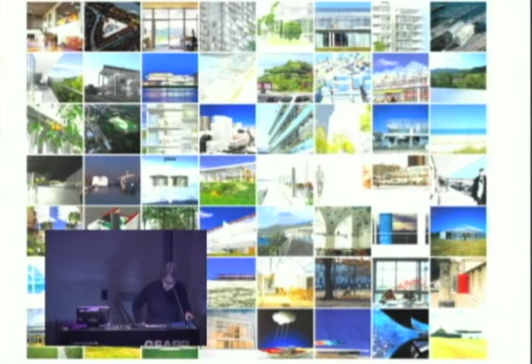I will talk tonight about the question of how to reinvent from the existing and present some projects which specially deal with the existing. However, these projects are part of all our projects.

You mentioned that we have done many projects, but not so many in 25 years. And the projects I will present tonight cannot be dissociated from all this cloud of projects because they form a continuous process of accumulation, addition, and reinterpretation. All these projects talk first about inhabiting, use, freedom, the value of the places, how you move in and transform them with attention and delicacy.

The concept of inhabiting is a major concept for architecture, as for some projects, founding projects like this one: the first house we did in Bordeaux, social housing that we did 20 years later, a house in the trees on the seaside, the Palais de Tokyo in Paris, or the School of Architecture in Nantes. The concept of inhabiting in all these projects is a major concept for us in architecture.

Inhabiting is about the pleasure, generosity, and freedom of occupying a space. It challenges us to think about the possibilities of the space around us and ahead. And architecture is about building multitudes of situations of usage, connected, intersected, and mobile.

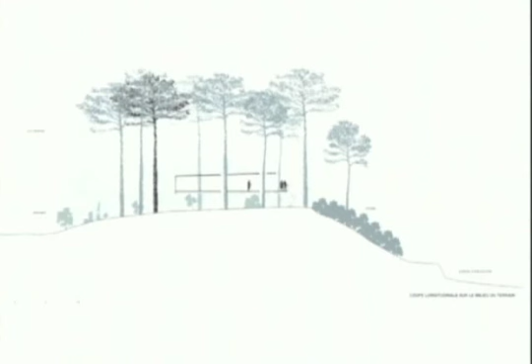The first one was to say, we will not cut any tree. We will keep all the 45 trees here, and we will raise the house 4 meters above the ground to protect the shape of the ground, to not damage this very fragile sand hill, and also to take advantage of the best view by staying 4 meters above. Then it was how to make the project so that it remains as light as these two initial ideas. So the house is a very simple house. It's a rectangle. There's not a scenography of the trees. They are just staying where they are, and we just took care that the construction doesn't touch the trees and takes enough distance to accept the movement of the trees in a strong wind.

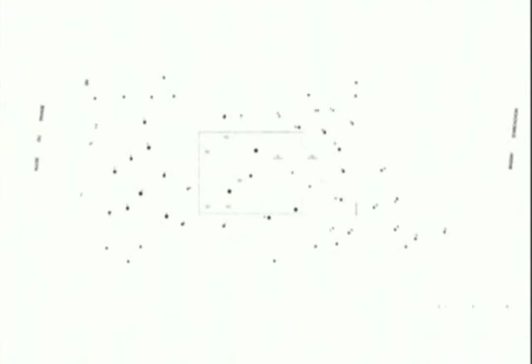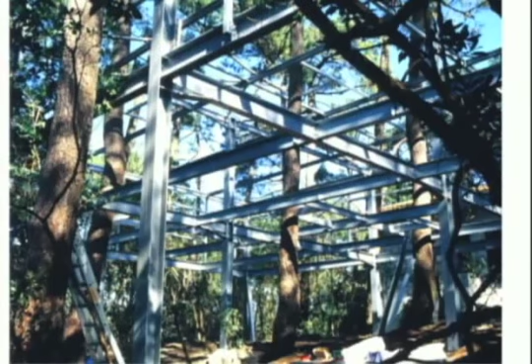So it's a steel construction made with very small elements, because it was important to build light, not to damage the site. So with small steel elements that we built around the trees without touching them. The house has one main orientation, to have the view on the seaside. And the face underneath the house is glazed aluminium to reflect the light, on the sea, 13 meters below the top of the hill. The trees are crossing the house. And when you are on the first floor, which is the main floor of the house, inside the house, a very simple construction.

It's a holiday house, and what is amazing is that in that place, the land costs so much that the cost of the construction is less than 20% of the cost of the land. So it means that it's almost nothing. The trees in the middle of the corridor are very old trees, more than 80 years, so we know that they may die. And when you are inside in this very large living room, you have this wonderful view on the seaside, and there is a kind of confusion between what is construction and what is the trees.

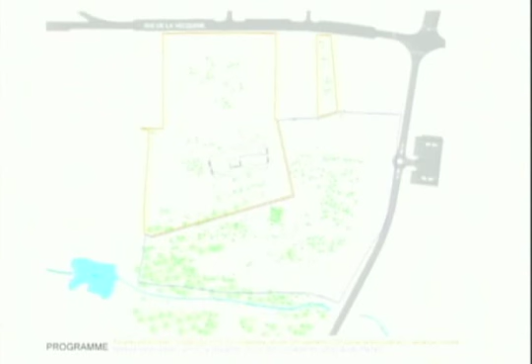Then we proposed to make some car parkings at the limit of the plot where there were already some roads and where it was possible to do it without cutting trees and so on. Then we decided to raise up the construction 12 meters above the land. It means that we were above the top of the trees, and we could keep every tree, every plant on the site. At 9 meters above the floor, it was just a little outside corridor, linked to the floor by some staircases and a few elevators.

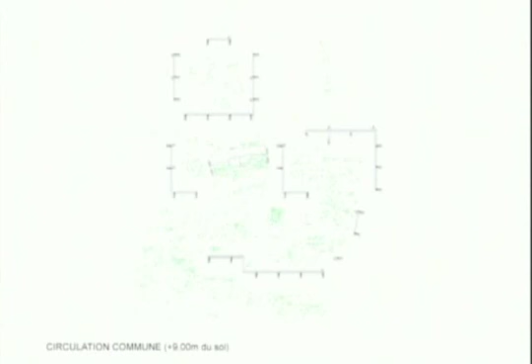And then the construction at 12, 15, and 18 meters above the floor. And doing that with some high points on the corners, we could build the 250 houses on the place without touching the floor. We could keep the water flowing, everything on the place.

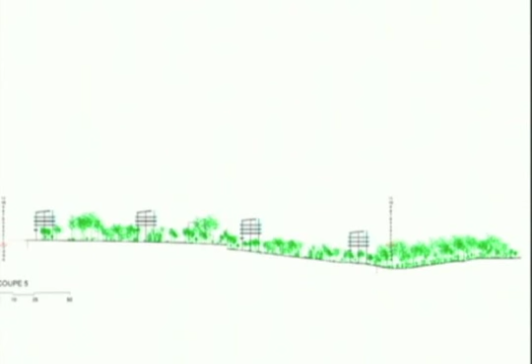That was the section of the project that we proposed. And the land could remain a public park, a public place where all the people of the city could go on walking and playing without disturbing the life of the construction here on the top.

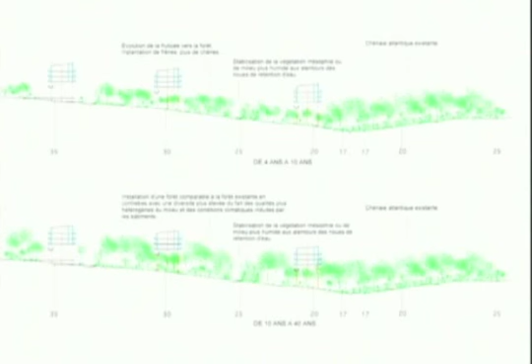And this project was also the opportunity to regenerate the vegetation, because the first year it was regressive, but after 4 years it was even bigger. And in 10 to 40 years we could recover the full forest that was existing 20 years before, and what we could see on the view from the sky of 20 years ago.

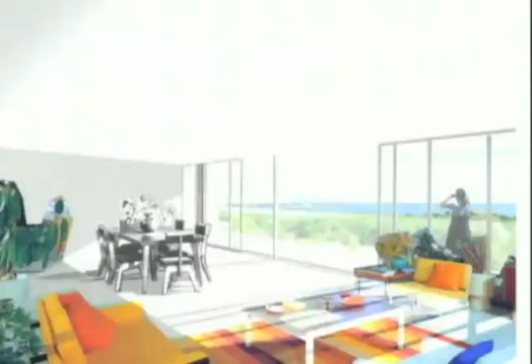The construction over here, you can see the pathway at 9 meters above. And the view that you could have at 12 meters for the first level of housing. This first level was made like a platform on a very light steel construction, made like big scaffoldings. It was made with dry construction.

And we could use the experience of some other buildings like this one, that we are building very close to the site. It is social housing, so it was not low cost, but economical construction, and the view from the last level.

So we didn't win the competition. We could expect maybe that, but it was a very interesting project to develop. And maybe we will have a second chance, because the project with the architect who won the competition was abandoned, and maybe they have the idea to restart one day something else on this site.

A second series of what to do with the existing is projects about what to do with the modernist social housing that we have everywhere in the cities, around the city, in the suburbs. We did more than 10 years ago with a friend, Frédéric Druot, in France, a study about that, which was activated when the government in France decided to engage a very important program of urban renovation based on the demolition of many units, apartments of that period. More than 150,000 apartments were scheduled to be demolished.

We selected some examples in the list of buildings which were scheduled to be demolished, and we wanted to study very carefully and in detail if something different could be possible than demolition and rebuild, and also to study the cost of these alternatives, given the fact that the government gave for demolishing and rebuilding one apartment between 150,000 euros to 180,000 euros. So it's a very big amount.

Now, in 2013, the French government has spent more than 15 billion euros to demolish 110,000 apartments and rebuild 100,000. It means 15 billion to lose 10,000 apartments.

So this economical question was important, but also the social question, because in these neighborhoods, the life is very often bad every day. There are problems of employment, education, problems of transport. It's not a very interesting place to live, but when you meet people there, you can observe that they have their roots here, and it's a place where they are living.

When in the majority of the housing blocks in the suburbs, they were very fast built, without taking any care to the quality of housing inside, and with, like here, very small windows, when outside you have the view, you could take the light.

It's a joke, but as a comparison, it's the same as the Farnsworth House, and Mies is looking at this structure. Hopefully it gave this very beautiful house, but could you imagine that? And Mies would say, I'm sorry, Mrs. Farnsworth, I made a mistake. But we know that we can also come back to this situation. And it's what we wanted to look at.

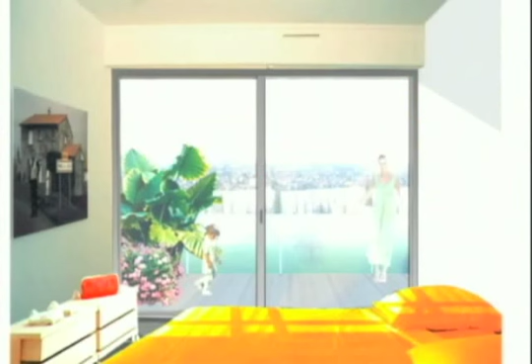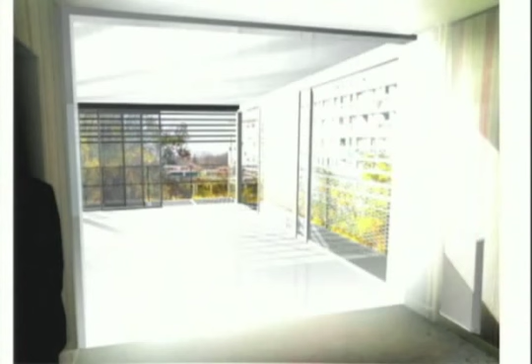Starting from this situation, which is for us uncompleted, it could be possible to open the facade, to bring balconies, and to change radically the situation, and to bring this housing to a very beautiful quality. So we studied on different examples how it was possible regarding the construction systems, regarding the possibility of doing that without emptying the buildings, regarding the cost, regarding the method of working, etc. Possibility of extensions when apartments are too small.

And we could arrive to the conclusion that in any case, something was possible to improve radically the quality of these buildings. And in the worst case, the cost was around 50,000 to 60,000 euros. It means 1/3 of the cost of demolition and rebuild. In the same time, the government gives a lot to demolish and rebuild, and only 10,000 to 15,000 euros to refurbish these buildings, which is not sufficient to make anything else than just changing electricity or windows, but it's not changing the quality of housing.

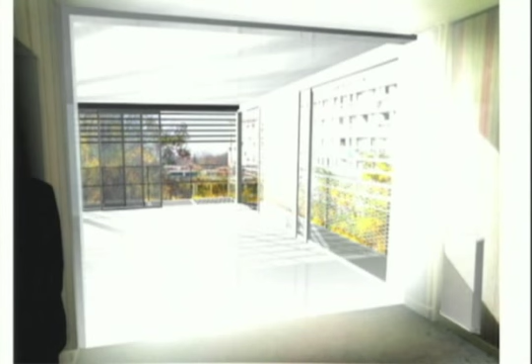So starting from this work of changing the quality of housing, at the end, the image is radically changed by changing the facade, making additions, making extensions, giving again natural light inside, providing large balconies that become like a private house on the floor, like a small garden, even if you are living in a collective housing.

On that basis, we published a study, a research, but this research was never discussed with the French ministries or anybody else. But we could publish it in Spain. And some years later, we could take part in the competition in Paris on this building. The city hesitated to tear down and to rebuild, but for some reasons, they decided to keep the building and to make a competition for the transformation. The title of the competition was Metamorphosis of this building.

This building is part of these neighborhoods built in the early 70s inside the ring of Paris, so it's a very, very good situation. And all these buildings were made by a good architect, Raymond Lopez, who built a lot of housing buildings like this one, even in Germany. And this building was of quite a good quality for housing.

But in the 80s, when it was time to make insulation, to save energy, for the first session of this refurbishment, they totally damaged this construction, and they put a cladding around of these different colors. They closed the balconies, the loggias. They put very small plastic windows, and they did that without taking any care of the quality of the space of the housing inside.

And even if it was technically made to save energy, it was not sufficient to last a long time, and 15 years after, it was again necessary to come back and to refurbish again this building. So for the competition, we proposed two main ideas. The first one was to say that we would work first by transforming the quality of space of housing inside. It's why we proposed to make these additions all around, to extend all the apartments. This crown around is 3 meters large.

And the second point was that we proposed to make this refurbishment without emptying the building. It means that the families, 96 families, can stay inside the building, because it was quite difficult to find 96 apartments in the neighborhood, and many of them wanted to stay on the place. So we won the competition on this basis.

The white is the plan of the existing building. We added also 2 new elevators to serve all the levels better and faster. And we changed 2 small elevators here for one bigger. Inside the apartments here on that plan, we had 8 small apartments, while some other levels had only 4 big apartments. So the extension on the long sides is only a closable terrace.

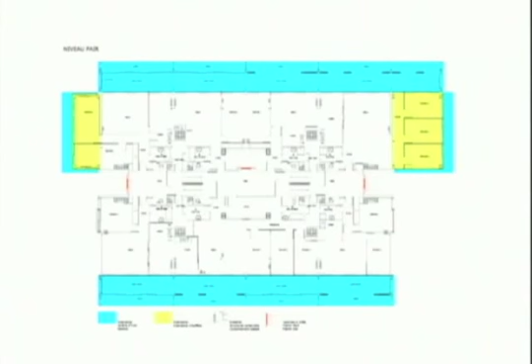It means a kind of winter garden of 3 meters. 2 meters can be closed, and 1 meter is an additional balcony. And the green surfaces are additional livable, usable space added to the existing to create new typologies with more bedrooms.

Then, because we proposed to keep the people inside during the construction, the methodology of working was extremely important. So we studied this extension as prefabricated modules that could be brought on the site and put in front of the facade and used as scaffoldings to take out the existing facade. We had here to take out both the facade of the 80s and the original facade, and both contained asbestos, so it was quite difficult to take out, with many precautions.

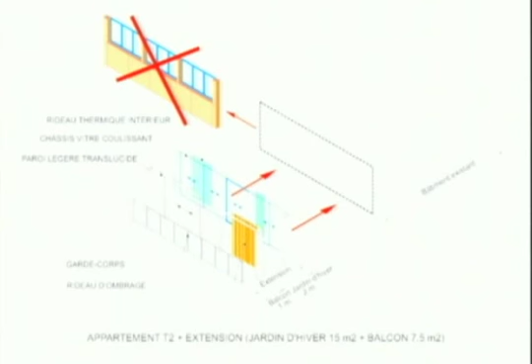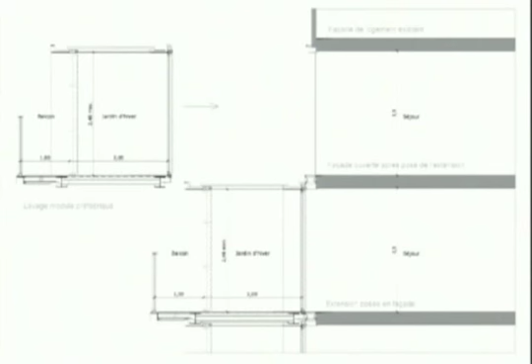And here, because we had a light facade, it was quite easy to take out the facade and bring these new modules made with steel construction, because it should be very light to go fast, and also the weight was important to elevate all these modules at 50 meters high. And it was a light construction for building this module, because our goal was to be less than 5 tons for this module of 7 meters by 3 meters.

And then when all the modules are built, we had a new facade with an extension at the same level of the existing rooms. The new section of the building with these 3 meters on each side, and we decided to make it the same for all the apartments. And the tower remains a tower, but for us it was not a point.

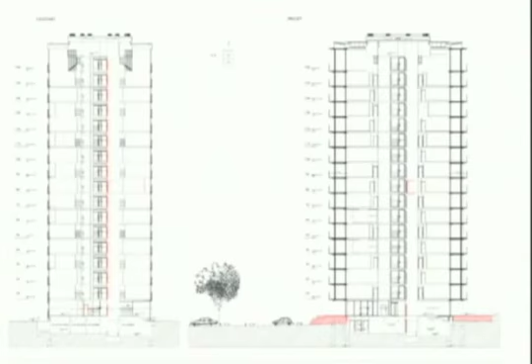After the competition, while we were going on studying the project, we started 6 months of discussion with the tenants. They were organized as an association of tenants, not only to discuss the project, but also to discuss with the owner in terms of the rents and all they have to discuss with the owner. But the first discussions were all together to explain the project in detail and also to reassure people that they could talk, that the process will be transparent and open, that they could take part in this process, not to make the project in our place, but to become the third partner of the construction with the inhabitant, who is the user.

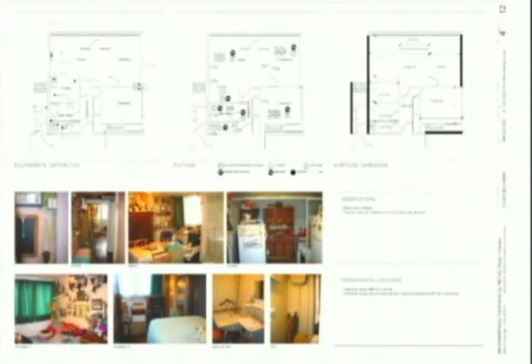Then we visited all the apartments to check how it was inside, but it was also an interesting opportunity to meet all people and to have discussions, especially with those who didn't talk so much during the discussions. And there was also, in parallel, a request made by independent persons who were not the architects and not the owner, to see exactly what was the situation of people and what they would expect as typology of apartment.

And we could see after this request that 40% of persons were not at the right place. Some old couples with 2 persons had a very big apartment with 4 to 5 bedrooms. Some young families with 1 child had an apartment with only 1 bedroom. And it was at that moment an opportunity to replace everybody in the right place. And finally, we managed to do it.

And in the meanwhile, they also had discussions with the tenants to fix the new rent. Finally, there was no increase of the rent due to the fact that there are 2 parts in the rent. One part is fixed, and one part is the cost of heating, maintenance, and so on. And because we were also reducing all this second cost, the combination of both finally made it so that the rent remained the same.

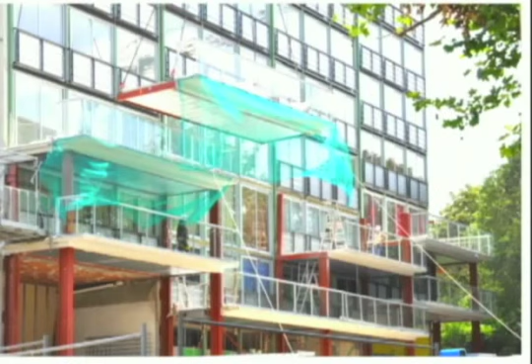After the 6 months, we went on with the studies. We got the contractor, and then we started to build a prototype of this module on a place which was not the place of the construction, because it was very small around. And then when all this was done, and when the methodology was very precise and detailed, we started the construction. 5 to 6 modules every day.

Beforehand, we changed the facade. It took 1 day to change the facade of one apartment, to take the old one and to replace it by a new one with double glass, sliding windows. And we put temporary handrails before building the modules.

The modules came not as a box, because finally it was not very intelligent to transport a box, because you transport a lot of void. And it was better to transport floors and handrails, and then they assembled these elements on the site. They put the windows of the winter garden on the floor, and then they elevated these modules.

And 3 months later, we completed the recovery of the facade. Then we did also important works inside, such as electricity, new bathrooms, some new apartments when the family changed apartments, but for some of them, families who stayed in their apartment, they wanted for many of them to keep everything inside, wall paintings, furniture, and so on.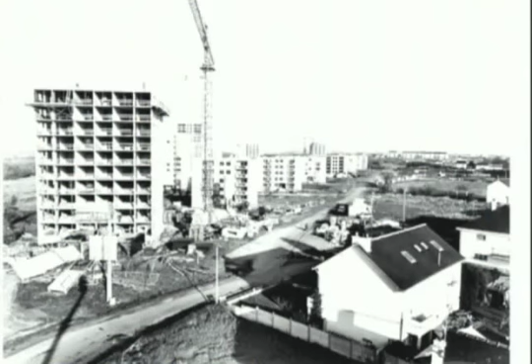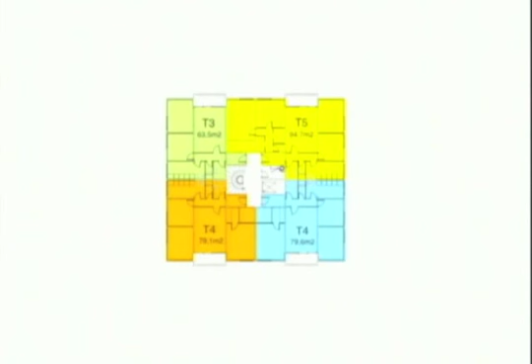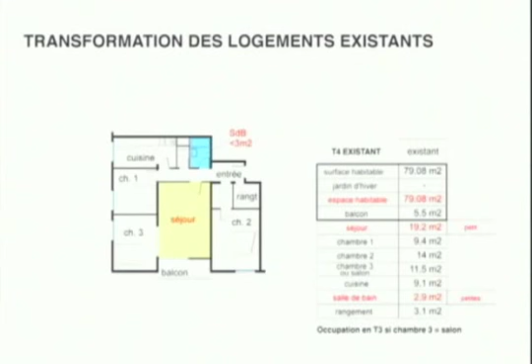So we started to work in the same way as the tower in Paris. Here the construction was very strict, with concrete tunnels, so it was quite impossible to imagine changing something inside because we didn't know exactly how the construction was made. So the project was to extend here again without changing anything inside the blocks. The blocks contain 4 apartments, a little bit small, but not so bad, with a very small staircase in the middle. And according to all the inhabitants, the main problem was this very small bathroom with less than 3 square meters.

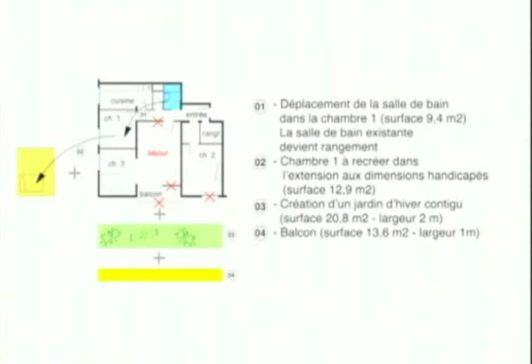So we proposed first to change the place of the bathroom and arrange it in the small bedroom, and to build an additional construction to replace the lost bedroom, linking this bedroom to the inside of the apartment by a winter garden and a balcony. That would make at the end this extra space of 33 square meters, including a big bathroom, a new bedroom, and a winter garden and balcony.

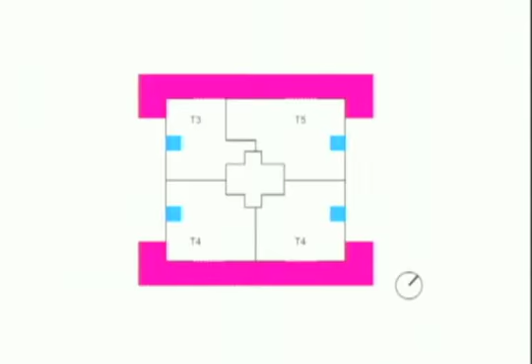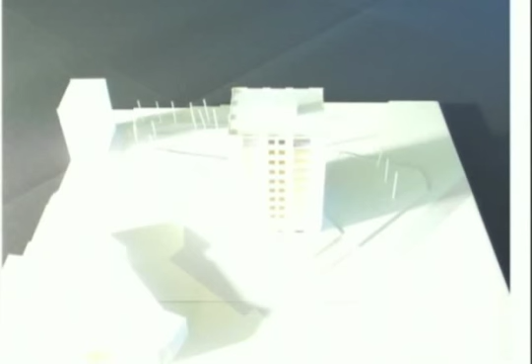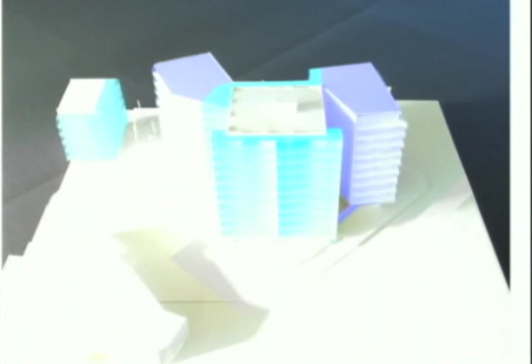So we proposed first to make that all around this building, but also because the floor situation is not the same as in Paris, here the constructions, even if you have the feeling that it's very dense inside, are very low density on the floor. All this neighborhood was less than 9% footprint on the floor. So we were thinking there was potential to propose a kind of densification of the place, and we proposed to add 2 wings to the existing building to provide 40 new apartments on this car parking area.

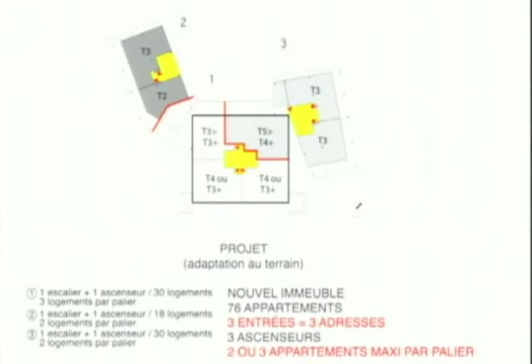And taking this opportunity to introduce a new entrance, new staircase, and make a totally new building starting from the existing one. And on the basis, a new car parking with a green terrace on top. That came at the end to this proposition, which was accepted by the owner. This was interesting, to propose this densification. Also, just some pictures of the proposed transformation.

Just to comment, that's a proposition as a goal to not only densify that building, but to extend this densification to all the buildings of the block, and to densify the edges of this block, this plot, in order to keep a park in the middle, but all the construction could be made over the car parkings.

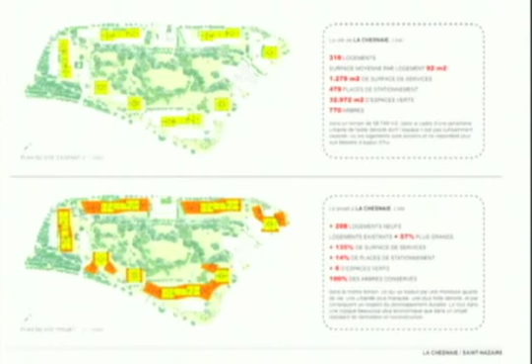And this project was an opportunity for the owner, who owns all this land, to build 200 new apartments on a plot which already belongs to him, so he doesn't have to pay anything for the plot. All the networks are already here, so you can connect without having to make any new networks. This place is very close to the city center, very well served, so the proposition on the first building was part of a project that should have been developed across this whole area.

The project took quite a long time because we had some difficulties getting permission—not to build, but... I don't know if you have that here, but we have some firms who control construction, and because this construction system was not very commonly used for building housing, it took a long time to develop more studies than we should have needed. But now it's going on.

You can see here there are additions. It's nearly a dry construction made with steel frames and prefabricated slabs made with steel, mineral wool and concrete. And step by step, the building is surrounded by this new construction until it totally disappears into the new construction.

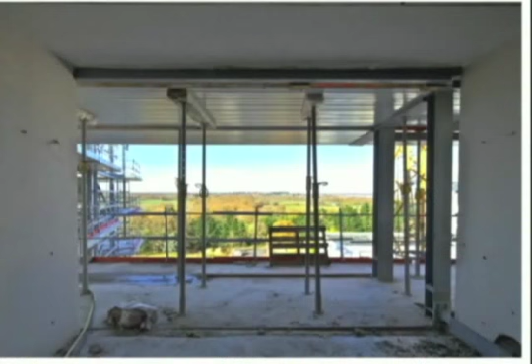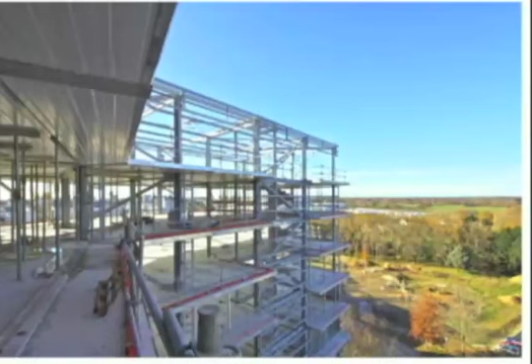The extensions in front, the windows of the existing building, and these new openings—before there were small windows, small doors. Construction with new wings here, this southwest wing, and the new additions.

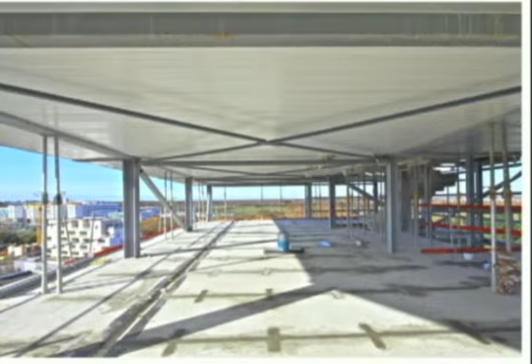Inside, this construction has only columns, and the partitions are totally independent of the structure, which allows a kind of flexibility to organize the partitions and the typologies of housing.

This densification is a very important project for us, following the tower project in Paris, because it's another step in this thinking of reusing, which is very promising for us, because there are so many areas like this which are quite empty but need new constructions—not only for housing, but also for mixing activities, for working, for public equipment.

Unfortunately, the director of the ownership changed in between, and the new one has no intention to develop the project in the neighborhood. It seems it will remain only one example. But in a way it's important to develop this kind of project, even if the first one doesn't go to completion, because maybe the second or the third will go further, and it's important to gain this experience from the project.

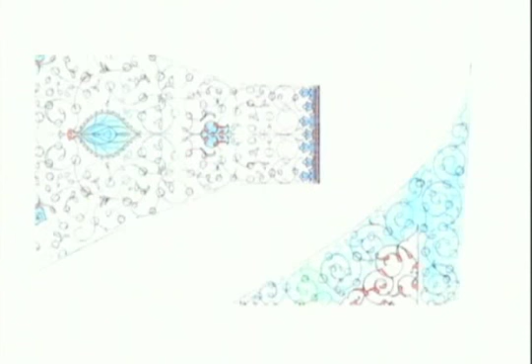So we did all this, she did all this design, starting from our design of the geometry of the vault. Then they produced the tiles, and finally that came this beautiful vault with these big flowers, and it seems that it was already there for a very long time.

Even in the kitchen, there are tiles in the ceiling because the kitchen was designed after. We made this partition after because first it was an open kitchen, but after the cook preferred to separate the kitchen, so we built the wall after.

Another important project for us in Paris is the Palais de Tokyo. It was built in 1937 for the Universal Exhibition in Paris. At the time it was not built as a pavilion, it was a museum divided in two wings. One wing belongs to the government and the other belongs to the city of Paris, and both were a museum for modern art when it was built. So that's pictures from the origin with all these sculptures, the basin.

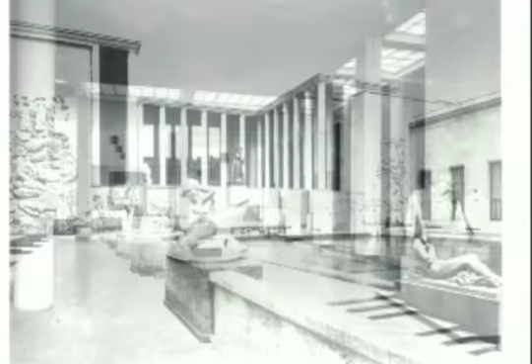Inside the museum, the part belonging to the government, in 1975 all this collection went to the Centre Pompidou when it was built, and this place became a museum for photography and cinema until the early 90s, when the government decided to make an important refurbishment project to install a museum for cinema. They held an international architecture competition.

They selected an architect who started to work, Franck Hammoutène. They started construction, and during 52 weeks, 1 year, they had just started to demolish and open floors, demolish stairs and all the partitions, all the ceilings, when the government decided to stop the project.

And to let the place stay as it was. So it stopped in '96, as far as I remember. It stayed like that for 3 years, and in '99 the Ministry of Culture decided to put here a temporary site for young creation.

They did a competition, and it was made as a project we expected to last 5 to 10 years, with a very low budget of 3 million euros, 26,000 square meters on 4 levels.

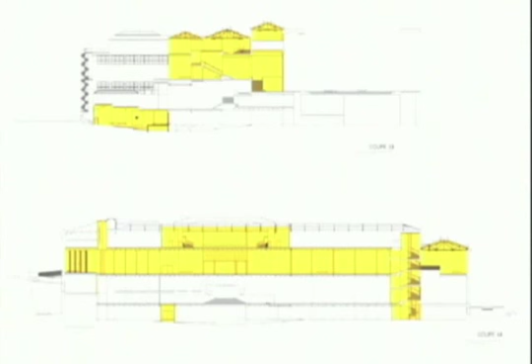We didn't find the need or desire to add any architecture inside, just to allow this architecture to again be used and open to the artists and to the public. So 3 million euros is not so much when you have to work on such a place, but we worked step by step, starting from the most important, and we said that if when we had spent the 3 million, maybe we wouldn't have anything left to make the paintings, but finally it was not a problem.

And we started the works on this basis. It was 1 year of works. The goal was to open it again to the public and to exhibitions. And it's what we did in 2002.

This place was very successful with millions of visitors coming from everywhere. But we only arranged 1 level for exhibition because we didn't have enough money to open more than this 1 level. And on the ground floor we did storage and technical rooms. Here was the first restaurant, which changed later.

And this project by an artist, on one side of the building, which is gardens for inhabitants. They divided the place into 10 small gardens, which were given to inhabitants, not of the neighborhood, because in the neighborhood there are many rich people who don't need and don't want any garden. But some workers from the construction came here to make the garden.

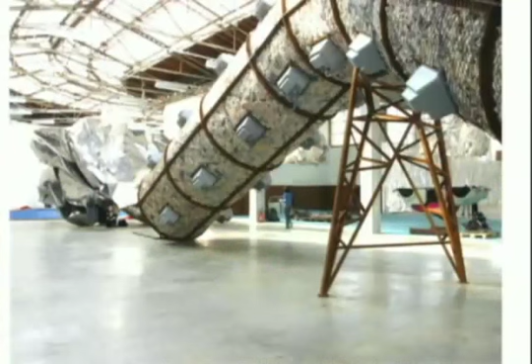It was very amazing to see that in this neighborhood. And during 8 years, between 2002 and 2010, many kinds of different exhibitions took place there. Sometimes with the open sky and natural light, sometimes in the dark. But all the time the place showed that it was a very interesting place to make all these exhibitions. It's open from 12 to 12 in the night.

At the beginning there were no keepers of the exhibition, only young people who welcomed visitors and made commented visits. And so it was a very nice atmosphere, very open. And many people who normally don't go to this kind of places, because it's sometimes too closed and they don't know what they will see inside, they don't know if they like it. They are not used to seeing contemporary artworks, but here it was so open that many people came and stayed and came back with families on Sundays.

And then in 2010, because they decided that it was no more a temporary place, they decided to make a definitive project, and also because we were close to the election for the presidency, and you know that presidents like to open new museums before the election. And finally, because it was not so expensive to make something inside, President Sarkozy decided to say, okay, it's my favorite project, and we must make something in this building so that it should open in April 2012, 1 month before the election. So everybody ran, and in a very fast time they organized the competition.

And in June, of course, we applied to the competition because for us it was very interesting to come back and to make a second phase on all these amazing places which were remaining in the building. There remained more than 16,000 square meters empty without any function, but we had already prepared this place by reinforcing the columns, the floors, and it was ready to go on. So we applied to the competition, and for sure our knowledge of the place and these very strict conditions of short time made that we were selected to go on for the second phase in the same spirit as the first one. So we started the study.

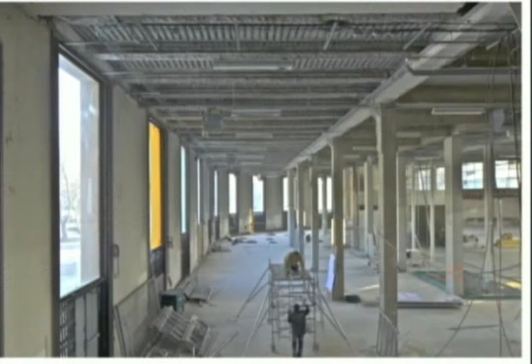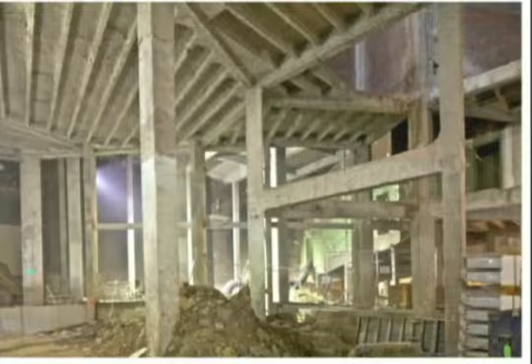We did the study in 6 months, and then the construction took 9 months, and in April 2012 it was ready to be opened by the president. Unfortunately, he was not elected, but the place is open, and it makes many visitors happy.

So we had an amazing place in the ground floor, which is like a basement, but in the program these places were dedicated for storage. We proposed not to make storage, but to extend exhibition to the place, because we found it interesting to have a variety of ambiences, from full natural light to the very dark spaces in the basement. Here the budget was higher. It was 13 million euros, which was not a lot for 16,000 square meters. But we proposed to work everywhere and to open every space to the public, from the ground floor to the top.

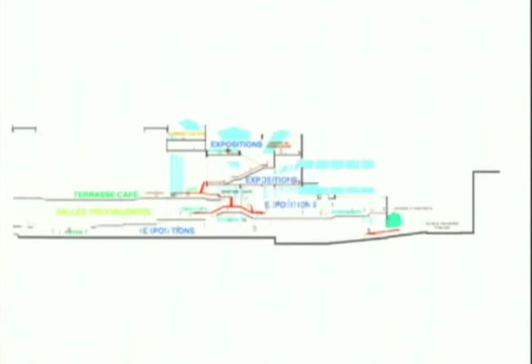At the time, as you explained, for this project our reference was the Fun Palace as an architecture of freedom, of atmosphere, of quality of uses, and especially this sentence of Cedric Price explaining this project. I don't remember exactly, but it's: you can come from everywhere, enter, move on top, look at the others doing something. So for us it was this example of maximum freedom that you can give to a place, not to say to the people you must use it as it is, but just to say we give you a kind of tool with maximum possibilities and some tools to use it. And the interest is sometimes to come back to the maximum potential to redefine every time a new use of the place.

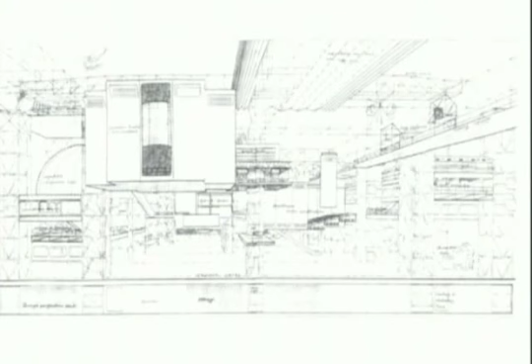And the only important thing that we did is this big stair that links all the levels, because there was a monumental stair, but it was just linking 2 levels, and now this one is also linking the ground floor, so it's easy to move and have different ways to move in the place. And some pictures after the opening. Now they have a big amount of square meters to make exhibitions. The first exhibition was part of the Paris, I don't know the word in English, triennale. Triennale.

So there were many people coming for the opening, but now they are starting the new program, and the last exhibition opened two weeks ago is very interesting, but it's also very pleasant to have the possibility to move very slowly to visit all these different places, to stop here and to stay a while, to be sometimes in the dark, but sometimes under the transparent ceiling, to have the view to outside, to the exterior space, through these

high windows. So this place has a very high potential. And from the origin, it was a museum, and it makes really a difference. It was not a factory. It was a museum, and the way of the light coming inside, all the walls to exhibit, it's a very, very interesting place. We have refurbished all the transparent roofs, so now it seems that it's okay for a long time to stay here.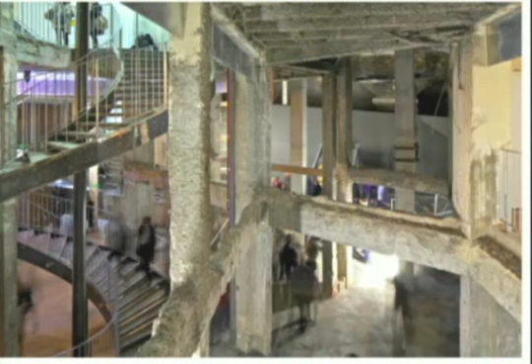And now going in the basement, this auditorium, which was made in '37, but opened just one day because there were no security exits. So we did exits, and now it can be open as a small music room. And some dark rooms with special artworks. As this one is a kind of cavern made with threads, and basement.

This new stair that allows to cross all the levels coming from the entrance, and allows to go up to the 4th level with all this transparent roof, and here again some artworks.

And just the last, and I promise it is the last. You talked about this project in your presentation, and it's a very small project we had to do more than 15 years ago in the city of Bordeaux. The mayor decided to launch an important program of embellishment of the public squares, and we had to work on this one, which is a very small square, which is retired from the city center. We didn't know this place, and we had no opportunity to cross here because it's a little bit apart from all the main streets. And we had 4 months to propose a project to embellish this square.

And finally, at the question, if I want to make this square more beautiful, what could I do? We developed many arguments to say that the square was already beautiful. The shape is a triangle with streets around. There are beautiful houses around. There are trees all around the square. There are benches, which are not new benches, but they are in good state, and they are similar to all benches that you can find in public gardens. The floor is